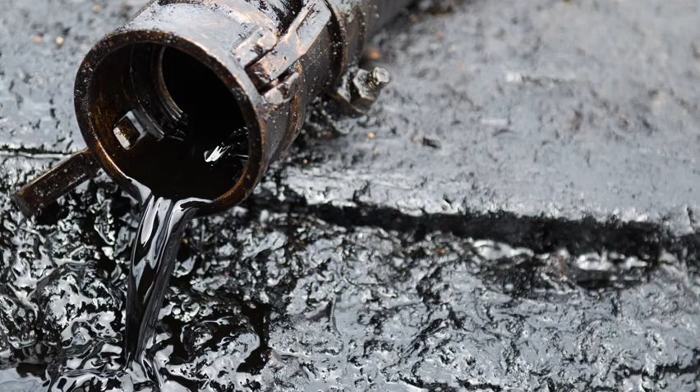This presentation is a training aid for the Spill Prevention Control and Countermeasures Plan, also known as the SPCC Plan. It was developed for Joint Base Charleston Air by the 628th Civil Engineering Squadron Environmental Element. A hard copy of the SPCC Plan can be obtained at the Civil Engineering Squadron Environmental Element in Building 721 at Joint Base Charleston Air.

Instructions to obtain an electronic copy will be provided later in this presentation.

Your point of contact for this training, as well as any questions concerning the SPCC plan or requirements, is the Storage Tank Program Manager at the Environmental Flight, Ms. Mattia Wright. Her phone number is 843-963-4518, or you can email her at mattia.wright@us.af.mil.

Topics to be discussed during this presentation include what is in the SPCC plan. Also discussed will be periodic inspections of oil storage tanks, as well as responding to spills.

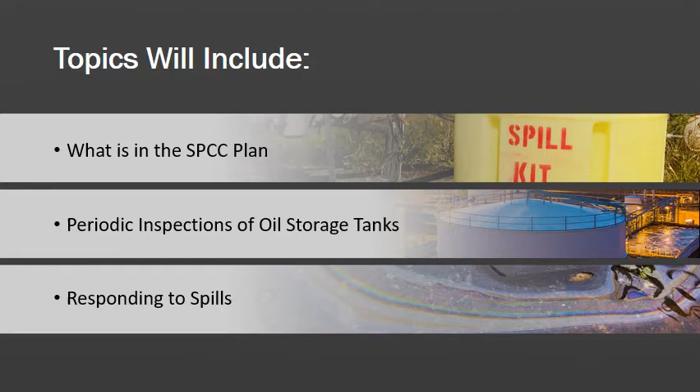So why worry about oil spills? Well, clearly in the past, we are familiar with the Exxon Valdez oil spill or the BP oil spill in the Gulf of Mexico. And obviously, these events had huge detrimental effects on the environment.

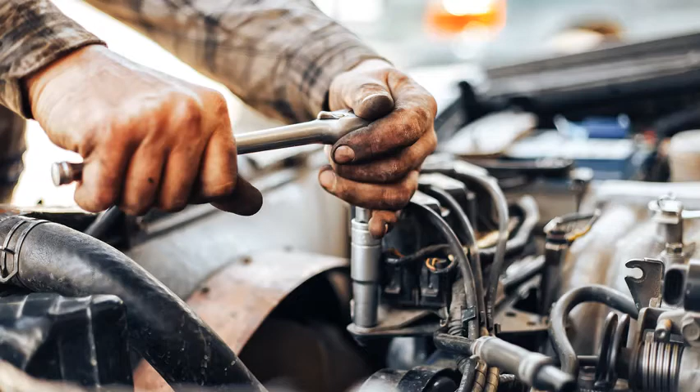But these products are used every day in our everyday life by everybody. It is the environmental engineer's job to find the controls and mechanisms to prevent the release of these chemicals while not interfering with their availability for everyday use, including the production of food and their uses in the actual food we eat.

It is inherently obvious that we want to keep chemical hazards along with their wastes separated from the areas where we live. Even the chemicals used to produce the food that we eat need to be kept separate from the food itself.

When spills of chemicals or oil occur, there is a possibility of people being exposed to these materials by various methods. If any of these chemicals evaporate, for instance, they could become part of the air or smog and be inhaled. It is also possible that the contaminants can work their way into drinking water sources, and people can be exposed by drinking polluted water.

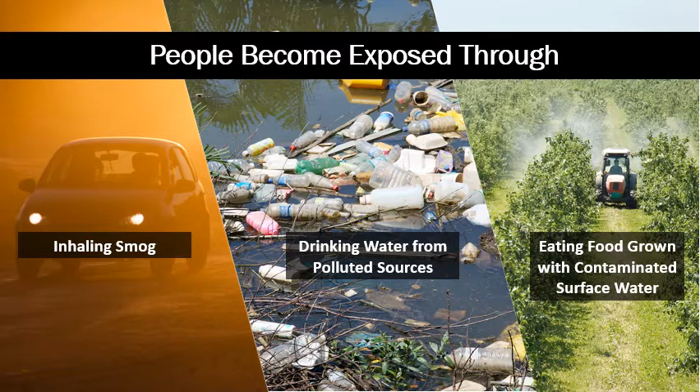Also, if some surface waters are contaminated and that water is used for irrigation, there could be direct contact and exposure to food, and eventually exposure to people through eating that contaminated food. This is what we are trying to prevent: the exposure of people to chemicals that may be detrimental to their health.

Let's discuss from where the authority of the SPCC plan was originally derived. In 1972, Congress passed the Clean Water Act. Once passed, the Environmental Protection Agency, the EPA, was required to develop regulations to assist industries with complying with the new act. Some of the regulations developed required industries and certain facilities to develop plans to prevent the occurrence of spills and other hazards, namely SPCC plans.

The Air Force, in turn, has developed instructions requiring installations to have individual SPCC plans that are at least consistent from installation to installation.

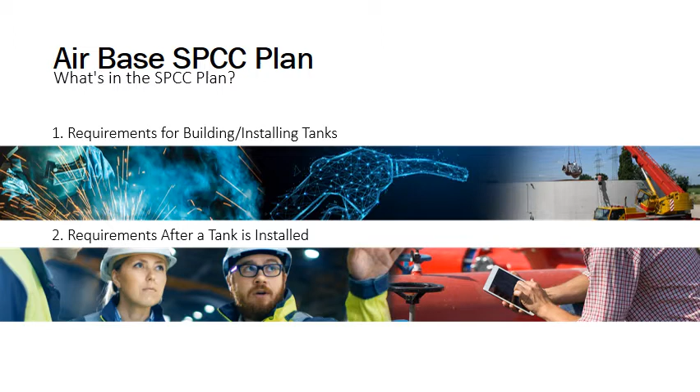Let's look at some of the requirements after a tank is installed. First, there are training requirements. There is both initial and refresher training required by all personnel involved with oil transfers or handling. This is what you are participating in right now.

There are also requirements for inspections to ensure that tanks are not leaking, as well as requirements for when a spill occurs and proper notification procedures. For now, we will discuss general aspects of tanks and berms, as well as some procedures and periodic inspections, and deal with spills and notification procedures later in this presentation.

This is a partial map of the airbase. As you can see in the legend on the right, it takes actually 3 different maps to cover the entire base. It is a map showing the locations of the POL storage facilities at the base. POLs, of course, are petroleum, oils, and lubricants. There are over 400 of these facilities at Joint Base, so we are just using this one map as an example.

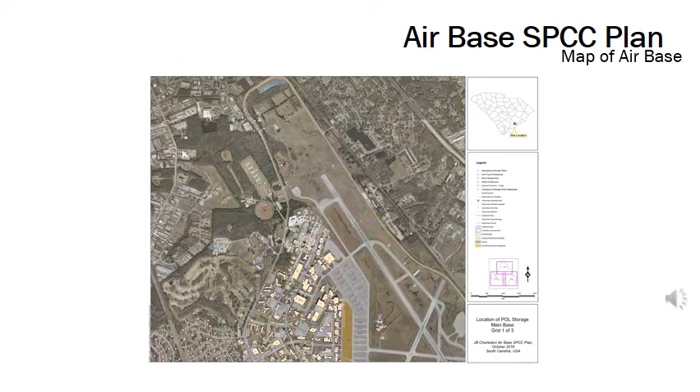These maps provide information of what types of POL storage facilities there are. For instance, A's represent above-ground storage tanks. Anything with a B is where mobile oil bowsers might be located. F's represent fuel truck parking areas. D's represent drum storage areas. And E's represent electrical transformers that have 55 gallons or more of oil contained in them.

Also on these maps are the blue lines with arrows, which show you the direction of stormwater flow, and even more importantly, there are the orange dotted lines, which show you the open stormwater ditches and the actual direction of runoff in the immediate vicinity of a facility. It is vital that all are aware of where the material is going to go if a spill should occur.

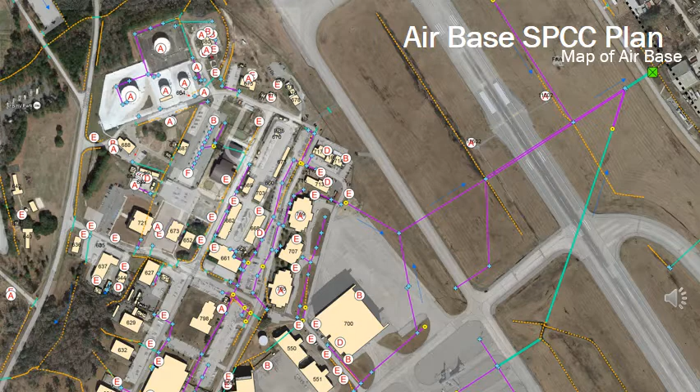Make sure a tank is not leaking when you fill it up. Someone has a painful grasp of the obvious. But this is why SPCC plans are written and standard operating procedures are developed.

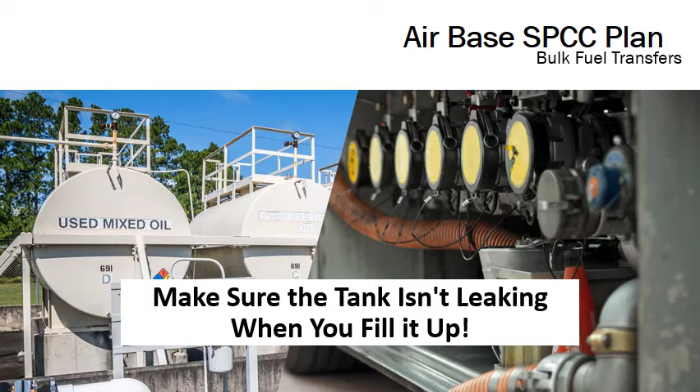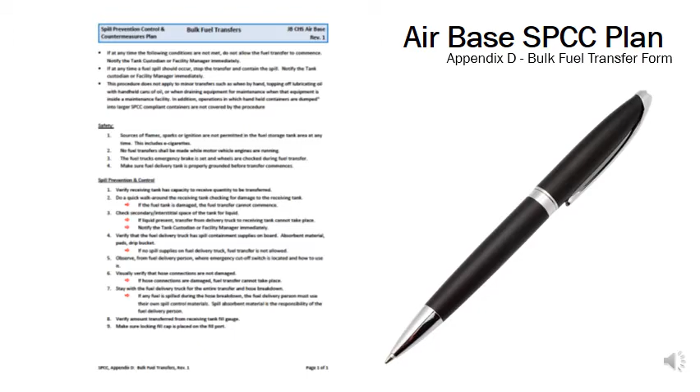In Appendix D of the SPCC plan, there is a checklist to be used when refueling tanks. At the top of the form, there are some conditions and safety items you should observe when refueling a tank. In the middle of the form, several steps are provided to prevent spillage while refueling a tank.

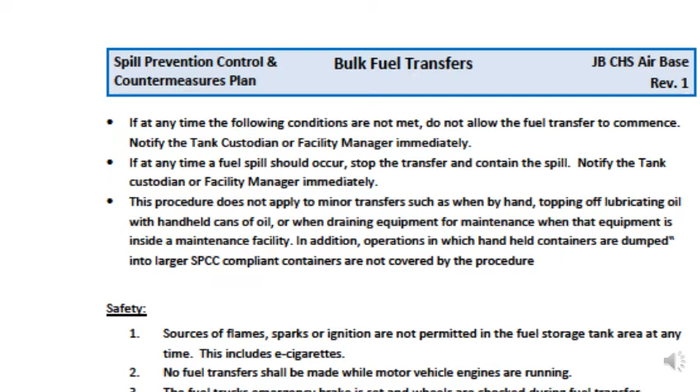For example, verify that the receiving tank has the capacity to receive the quantity you're trying to transfer. By checking gauges before transfer and during the transfer, you can ensure that spillage will not occur. As you approach the maximum quantity of the transfer, you should back off on pumping speeds to ensure no spillage occurs. You should do a quick walk around the tank and check for damage of any kind.

You should check the berm or any other interstitial space for fuel. If there is already fuel in either of these areas, there is obviously an issue with the tank and the refueling should not occur.

Be sure that the truck has containment supplies on board, like absorbent materials, a drip bucket, etc., or that they are available at the facility itself. Be sure everyone involved in the transfer knows where the emergency cutoff switch is located. You should visually verify that all hose connections are not damaged and that the hoses are in good shape.

You should remain with the fuel delivery truck for the entire transfer and hose breakdown. During the time of the hose breakdown, it is most often that spills may occur. Verify the amount transferred from the receiving tank and make sure to lock all fill caps in place on both ends of the transfer.

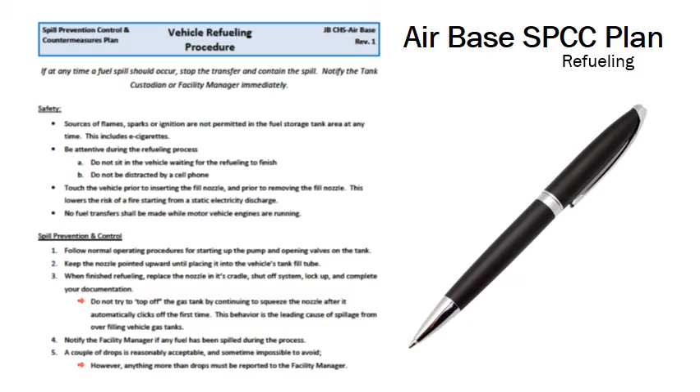The vehicle refueling procedure seen here can be found in the SPCC plan. Some safety measures include: all sources of flame, sparks, or ignition are not permitted in the fuel storage tank area at any time. This includes e-cigarettes.

You should be attentive during the refueling process. Do not sit in the vehicle waiting for the refueling to finish, and don't be distracted by a cell phone. You should touch the vehicle prior to inserting the fill nozzle and prior to removing the fill nozzle. This lowers the risk of a fire starting from a static electricity discharge. And no fuel transfers should be made while motor vehicle engines are running.

A few simple things that could prevent spills would be: keep the nozzle pointed upward until placing it into the vehicle's tank fill tube. When you're finished refueling, replace the nozzle in its cradle. Do not try to top off the gas tank by continuing to squeeze the nozzle after it automatically clicks off for the first time.

And you should notify the Facility Manager of any fuel that is spilled in excess of a couple of drops, which is reasonably acceptable.

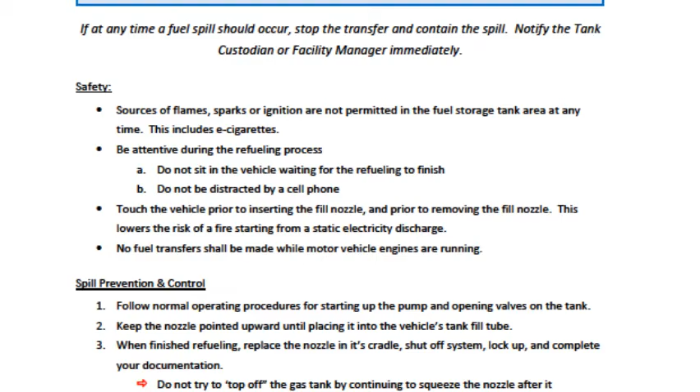The same scenario can also occur when you are pumping gas, whereby the spark could ignite gasoline vapors and may cause a fire or an explosion at the pump. Due to the importance when you are refueling vehicles at Joint Base Charleston Air or your own personal vehicles, we want to reinforce these important safety tips outlined below.

Always turn your vehicle engine off when refueling. Do not re-enter the vehicle while refueling because this can recharge your body with static electricity. If you must re-enter the vehicle, discharge the static electricity buildup by touching the outside metal portion of the vehicle away from the fuel tank.

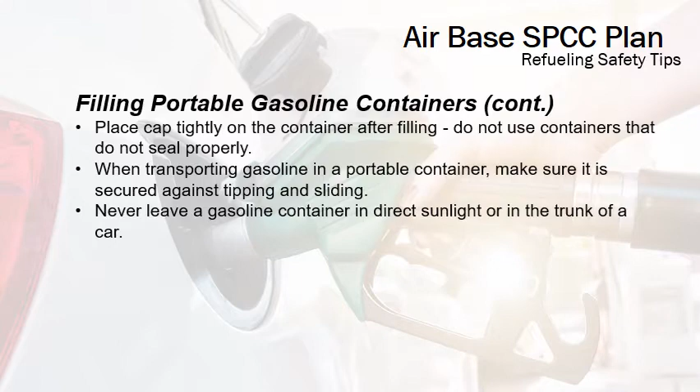Should a fire occur during refueling, you should leave the nozzle in the vehicle and back away from the vehicle. Use the emergency shutoff button to shut off the pump and notify the station attendant.

Now let's discuss monthly tank inspections. The AFI requires monthly tank inspections. Primarily, these inspections are performed by the owner or operator of the tank. That means if you have a tank at your facility, you are responsible for its monthly inspection. Tanks attached to generators are primarily inspected by PowerPro. There are also annual tank inspection requirements, but those more in-depth inspections are performed by the CE environmental element.

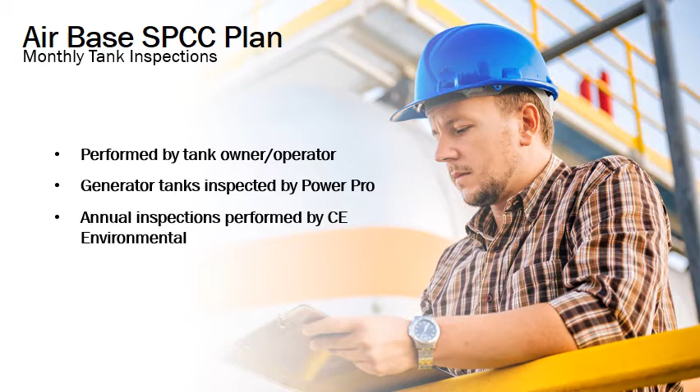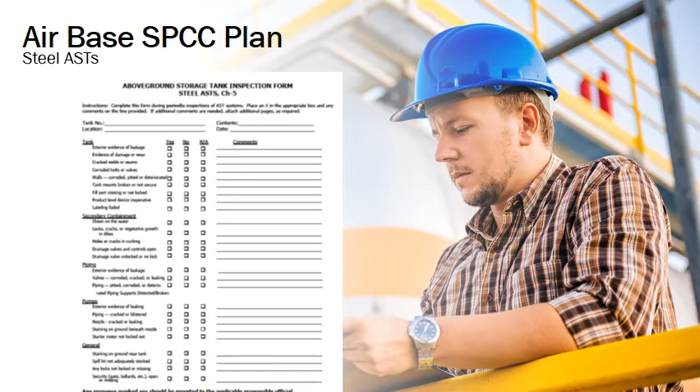It should also be noted that an equivalent form can be used rather than the specific forms found in Appendix D. An equivalent form in this case means any inspection form that meets the intent of the regulation 40 CFR 112. You should contact the environmental office if you want to know if the form you are using is acceptable.

Note the information required at the top of the form: tank number and location, as well as the contents of the tank and the date of the inspection. Also at the bottom, the inspector must print his or her name and sign the form. The form is broken up into several sections, and depending on the tank, not all of the questions may be appropriate for the tank you are inspecting. Hence, there is a not applicable column.

The first section on the inspection form is tank. There are various kinds of tanks at Joint Base Charleston Air, which we will discuss later. For instance, single-walled tanks versus double-walled tanks. For this discussion of inspections, we are talking about what you would naturally perceive as the tank, which would be both tanks of a double-walled tank, or obviously a single-walled tank. Carefully inspect the tank and make the necessary notations on the inspection form.

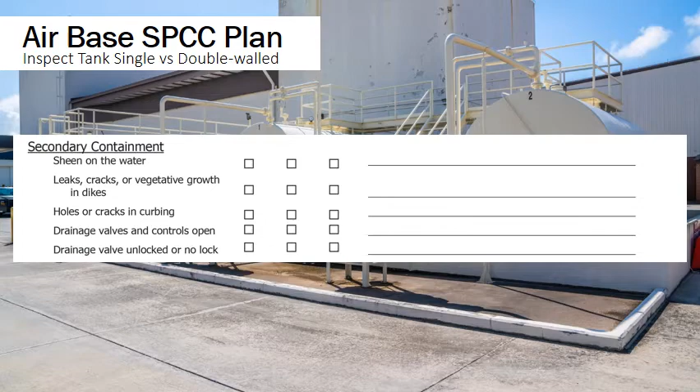Berms are a common secondary containment option. The interstitial space of a double-walled tank is also considered secondary containment. There are varying types of interstitial spaces and types of tanks, which we will discuss now.

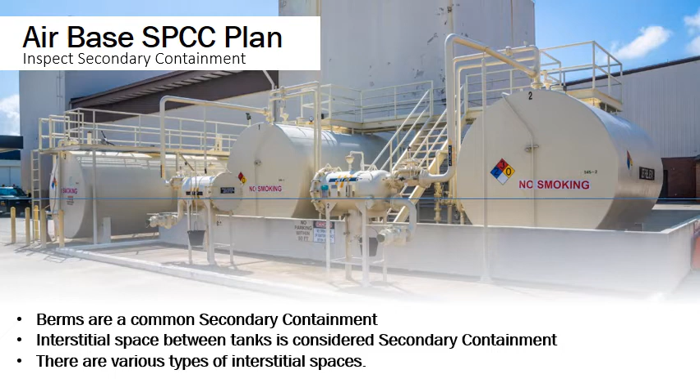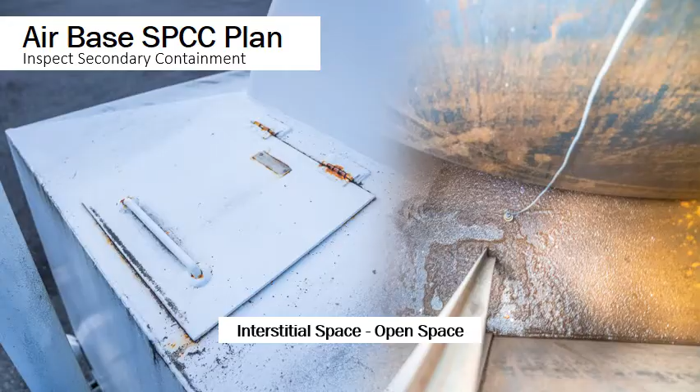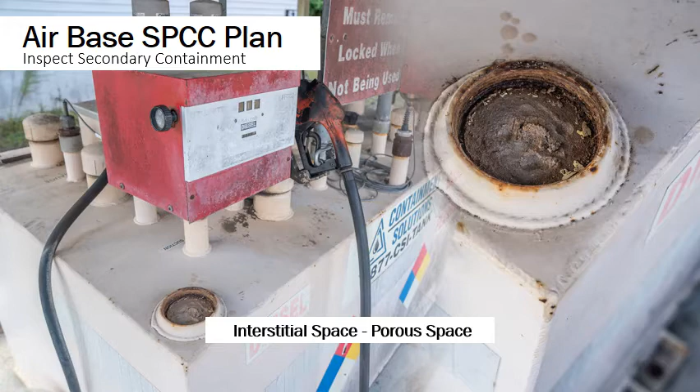This is an example of a porous space interstitial space. This interstitial space is filled with a sand-like material or grit. The only way to check for evidence of a fuel leak of the interior tank on an interstitial space of this type is to check the sensor readings. The sensors will be at the bottom of the interstitial space.

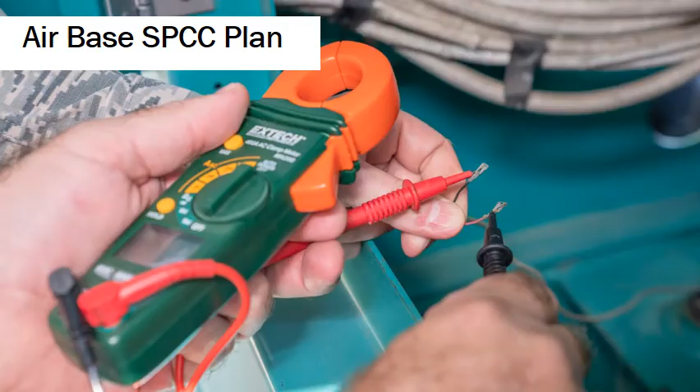Since some interstitial spaces are sealed, as are many double-walled tanks, and use sensors to detect any leaks, as is also the case for porous space interstitial spaces mentioned earlier, it is important to note that the sensors used need to be routinely checked to ensure that they are in proper operating condition.

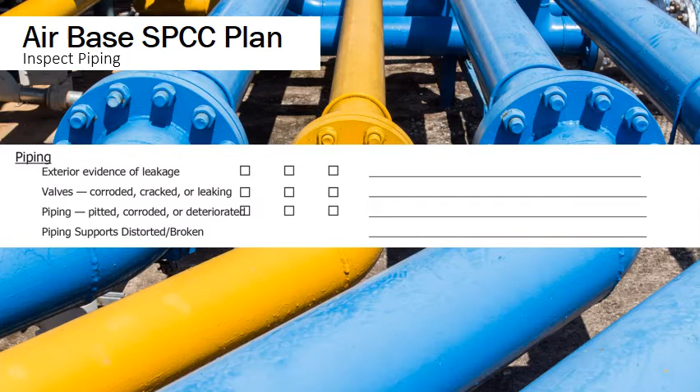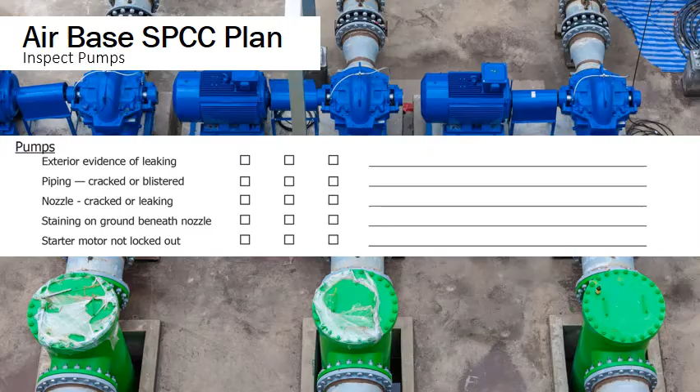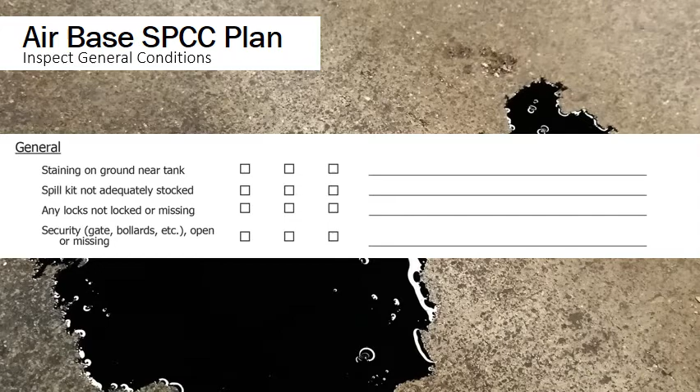There is also an electronic version of this checklist available online through the internet. If you are interested in using it, please contact the tank program manager at the environmental element, Mr. Earl Folger. He will need to grant you access and provide the necessary training for you to properly input information into the database.

The Storage Tank Accounting and Reporting, or STAR module of the APIMS database, is required by Air Force Instruction 32-7044 for all storage tanks. Access to this database requires a CAC-enabled computer and proper permissions granted to each individual user.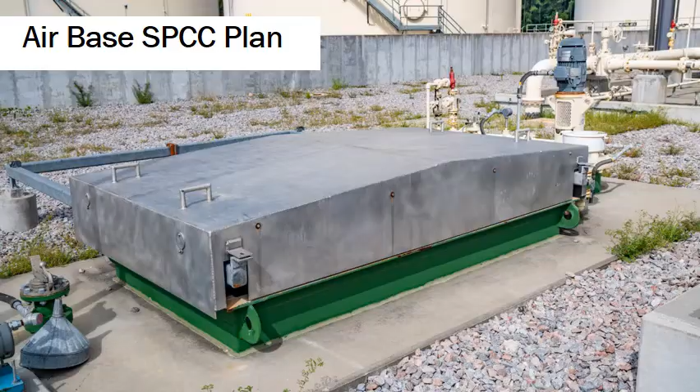The following slides will be a discussion about various types of tanks and berms, providing different examples at the Joint Base Charleston Air Site. The first of which is a vault tank, which is seen here in the closed position.

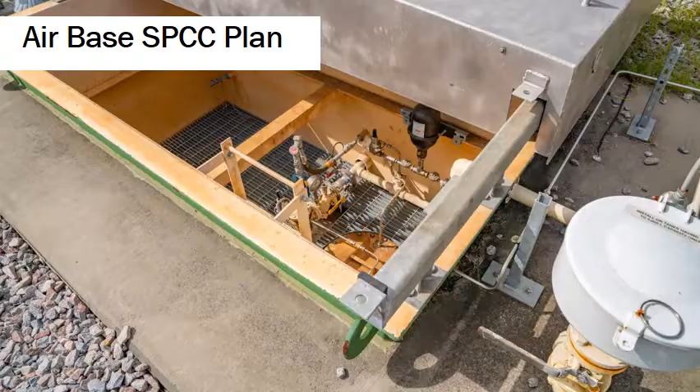In many cases, piping for fuel transfers is actually left fully charged or full of fuel when not in use. So when the time comes for maintenance on the line, the fuel is often pumped or drained to this vault tank so it can be recovered.

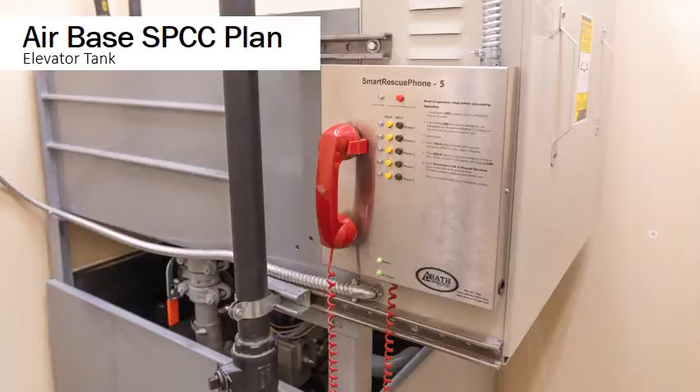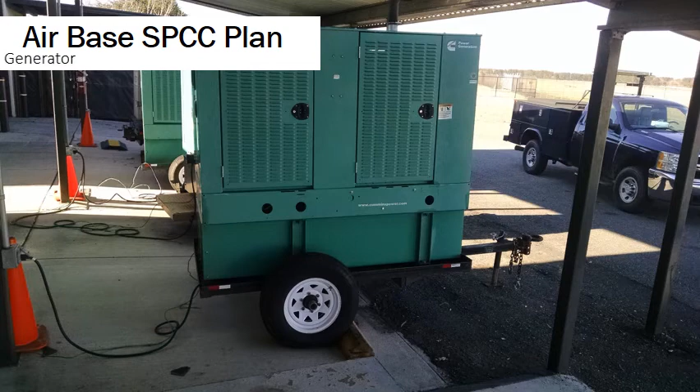This is an example of a portable generator with a belly tank. Whenever this equipment is not in use, it should be stored in an area that provides secondary containment.

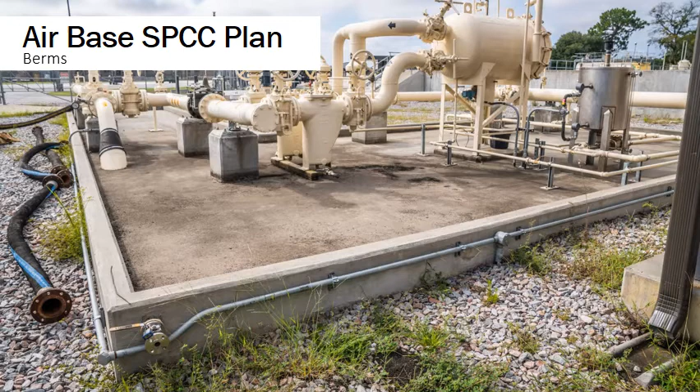Berms come in various shapes and sizes. They are designed to hold a certain portion of the fuel in the tanks or piping that they contain. Note the valve in the lower left corner, which is currently locked. This is the valve used to drain the berm of rainwater using very particular procedures, which will be discussed later.

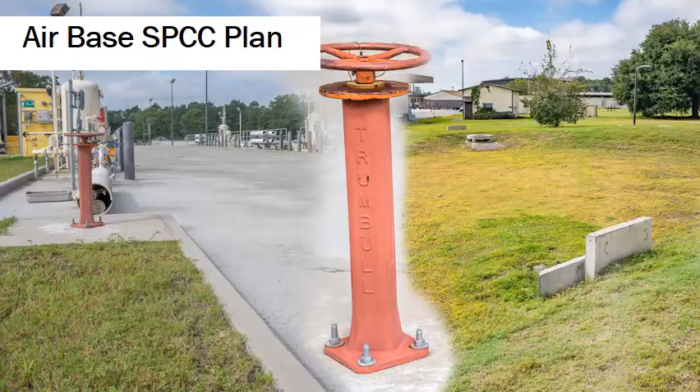We use the berm in this slide as an example of how a large area can be supported by a particular berm. The whole area on the left is the berm itself. There is what you would think was a storm drain in the middle. The valve highlighted in the middle of this slide, which can originally be seen towards the left, operates the valve that would release the rainwater from the berm after it fills up. On the right, you see the area where that storm water would drain to. Of course, this happens only if there is no fuel present, following particular procedures which will be discussed later.

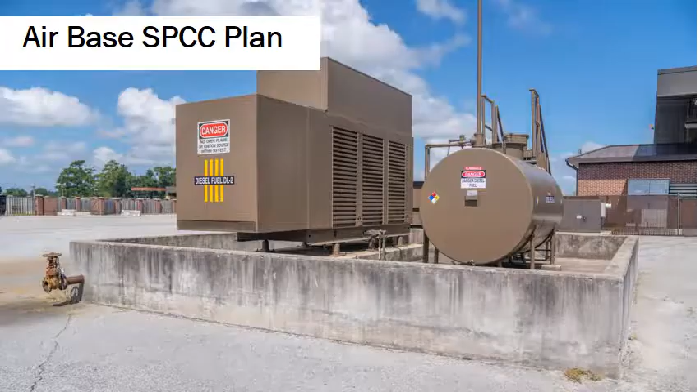As mentioned earlier, berms are to be maintained by the owner and operator of the facility they support. Maintenance of the berm can include removing any wind-blown debris, leaves, or trash. All berms should have non-automatic open and close valves. These valves are to remain closed and locked until rainwater needs to be drained.

A trained person knowledgeable in detecting sheens has to visually inspect and determine if a berm can be drained to the ground.

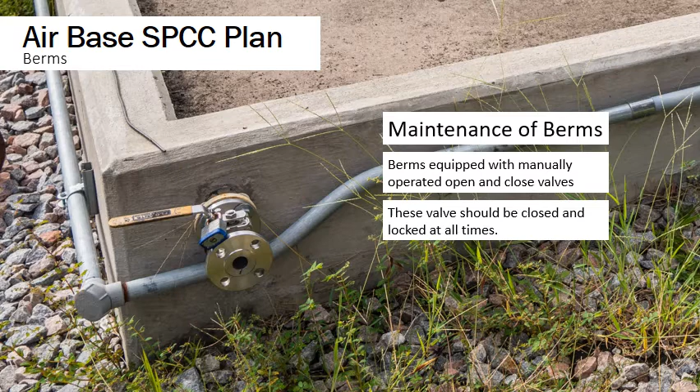The following procedures should be used in the process of draining a berm. First, inspect the rainwater for a visible sheen. For a minimal sheen, you can use absorbent pads to remove any product. When no sheen is present, unlock and open the valve to drain the berm. After the berm is empty, close the valve and lock it. Lastly, be sure to complete the secondary containment drainage log. It should be noted that if the sheen is excessive, or there is actually a layer of product in the berm, you should contact the environmental element for assistance in investigating the possible source.

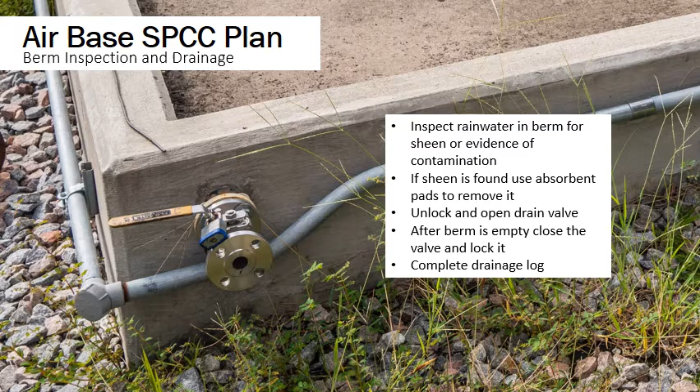A secondary containment drainage log must be kept for all berms. This draining log form can be found in Appendix D of the SPCC plan.

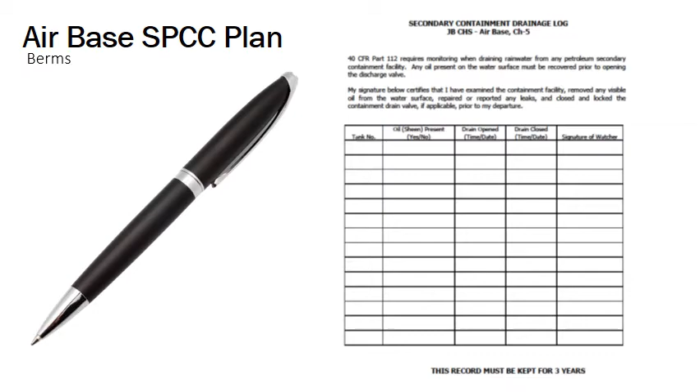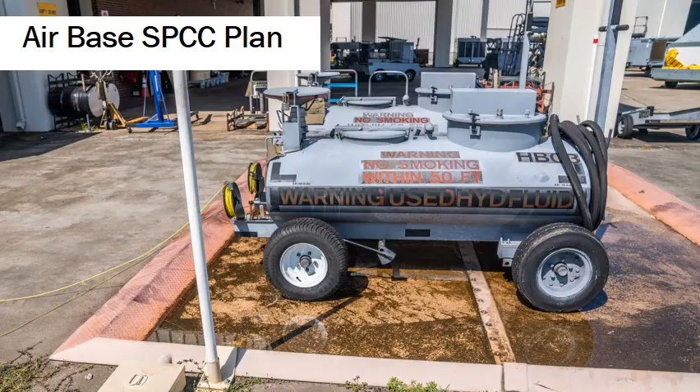Bowsers, when not in use, are stored in areas with secondary containment. It should be noted that empty bowsers, however, do not have to be stored in a containment area. Even though these bowsers are parked in what may be considered a temporary secondary containment, or berm, it still should be inspected, maintained, and drained according to the same SOP as a concrete berm.

All bowsers should be operated in accordance with their individual technical manual. Specific SOPs should be followed for the filling and transfer of fuel to and from the bowsers.

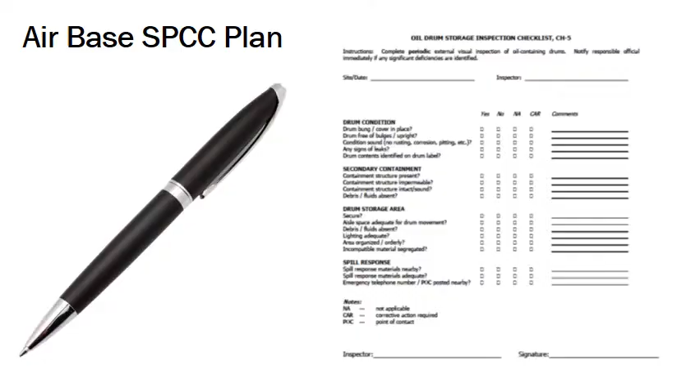Here is an oil drum storage area checklist from Appendix D of the SPCC plan. This should be used to inspect the drums on a regular basis, usually at least weekly. Any other form that may be used as a checklist must be approved by the environmental element before use.

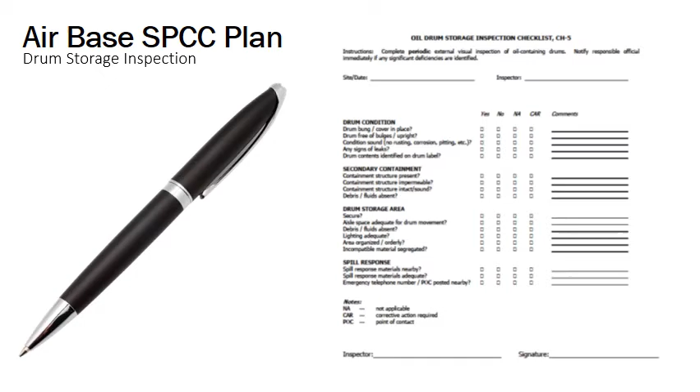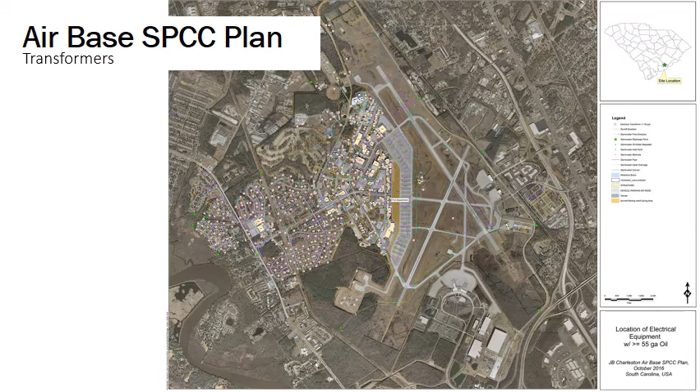A map is provided in the SPCC plan showing where all the electrical transformers containing in excess of 55 gallons are located. There are hundreds throughout every area of the airbase. Airbase electrical shop personnel are charged with doing the periodic inspections on all transformers. The checklist shown here is found in Appendix D of the SPCC plan and should be used for that inspection unless another form is approved by the environmental element.

Please note that although there is a section on the inspection form for secondary containment, there are no electrical transformers at Joint Base Charleston Air that have secondary containment. Each item in this section will be marked as not applicable. Anyone on base, however, who observes that there is an issue, perhaps a leak or a spill from a transformer, should report it immediately to the environmental element personnel and the electrical shop.

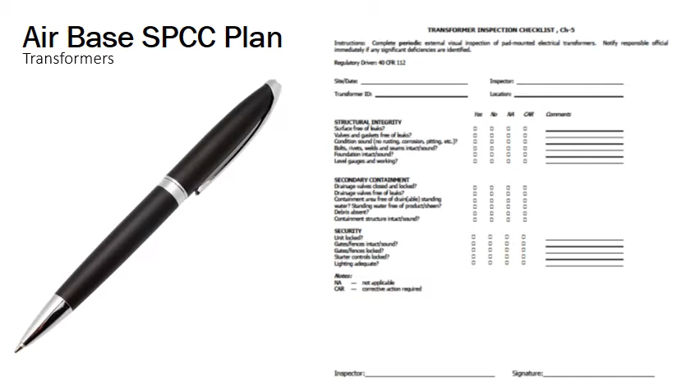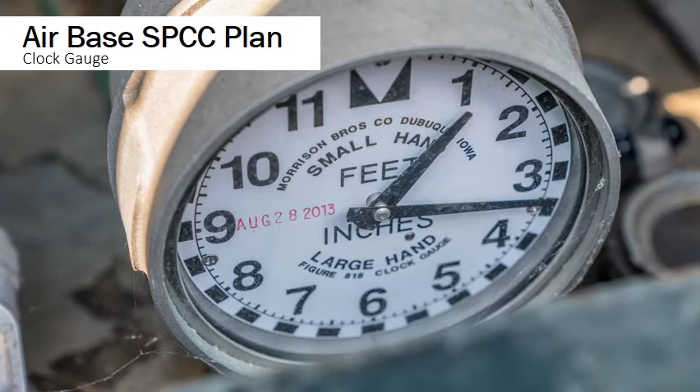One word of caution: sometimes gauges of this type become inoperable due to corrosion or buildup of materials around the disc inside the gauge. The only way to check this is to unscrew the gauge, which you should be able to do by hand, and make sure the disc is free to move and not corroded. There have been instances where the gauge indicated no material in the interstitial space, but because of corrosion, the disc did not rise up as expected and the leak went undetected.

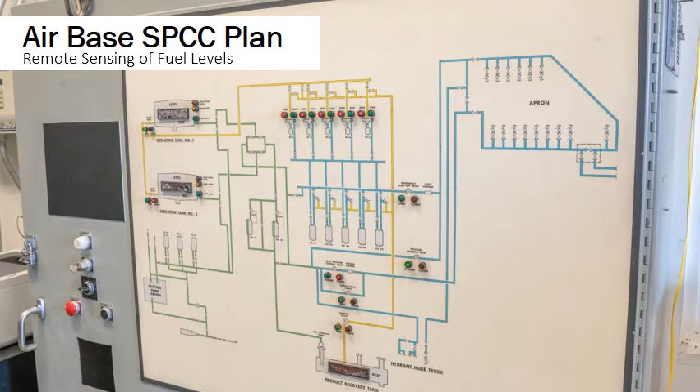Often in areas containing large fuel tanks, there is remote sensing of fuel levels. For instance, at the POL yard, their tanks are continuously monitored from within the control room. Also, the pumping of fuel and filling of tanks can be monitored and controlled from remote spaces, as is the case at the POL yard. All local SOPs need to be followed to ensure that transfers are continuously monitored to prevent any overfilling.

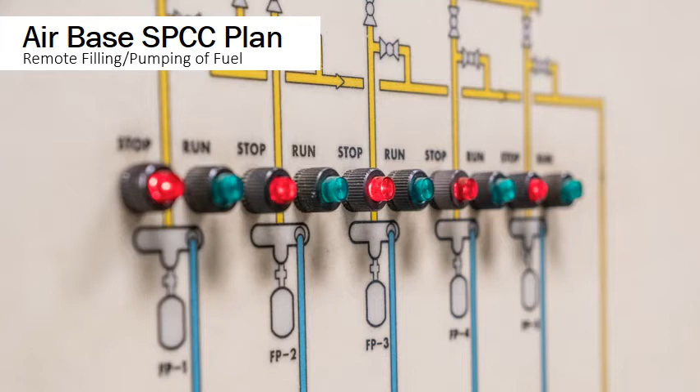It is vital that you are familiar with your surroundings and observant to what is going on. You should resist the urge to be complacent during routine operations just because you've done them 100 times. Always be vigilant and follow required SOPs. They were developed for a reason.

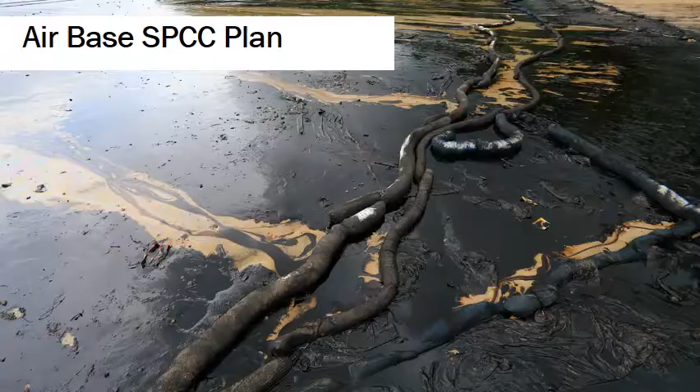Now let's discuss the last topic of the presentation: responding to spills and notifying proper personnel.

In accordance with the SPCC plan, the following steps are to occur concurrently in the event that a spill occurs. First, immediately notify the Joint Base Charleston Air Fire Department. If it is safe to do so, provide emergency assistance to any injured persons. Also, if it's safe to do so, stop the source of the spill or leak if possible. Further, you should restrict all ignition sources if flammable vapors are present. And if you are properly trained and authorized, you should initiate available on-site measures to minimize the spread of contamination.

Otherwise, stand by until emergency response personnel arrive on scene. Provide them with all the known details of the spill when assistance does arrive.

The key here is to recognize that anyone could perform steps 1 and 6: notifying the proper personnel and providing information to responders when they arrive at the scene. If it is safe and you are properly trained to do so, you can perform steps 2, 3, 4, and 5. But it is important not to assume that someone else is going to take care of the problem after you discover it.

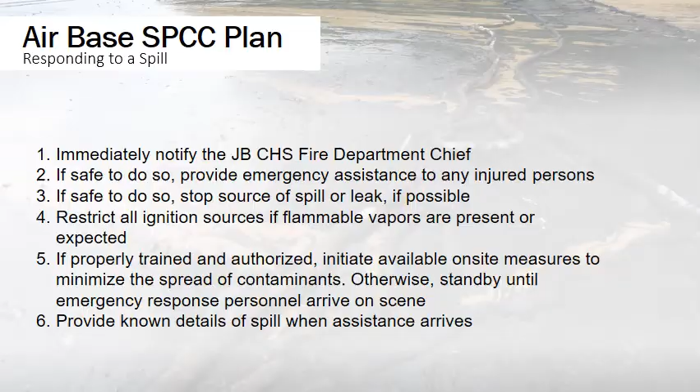As you are cleaning up the spill, remember that all materials used will need to be containerized in a drum or other proper container and prepared for proper disposal. This material may include the absorbent material spread to soak up the liquid, for instance the kitty litter or clay material, any absorbent pads or socks that were used, and any personal protective equipment worn during the cleanup.

One should keep in mind that very often this waste is disposed of at a cost per pound. You certainly should use enough material to get the job done, but keep in mind any excessive contaminated material will increase the cost of disposal. However, it is more important to get the job done.

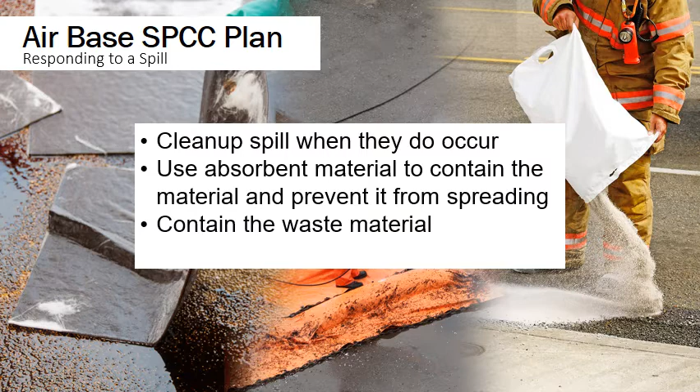Arrangements will need to be made to have any contaminated materials properly disposed of. Depending on what was spilled and the methods and quantities of materials used during the cleanup, disposal methods can vary.

Now let's discuss how to dispose of materials properly. There are varying methods of disposal depending on the type of materials themselves.

Recovered product: if the spill that occurred was large enough and you were actually able to recover product and it was still clean and usable, then no disposal is necessary. You should try and reuse it if possible.

If the spill occurs over dirt, then we have generated contaminated soil, and all contaminated soil must be dug up and containerized. Depending on the amount of soil, this may be done in drums, or oftentimes a dumpster is brought in for large quantities. This disposal should be coordinated through the environmental element and properly credentialed disposal contractors.

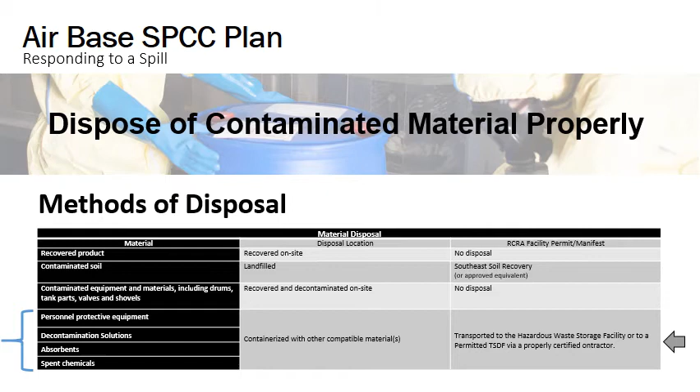Taking another look at our spill response procedures. Anyone can and should notify the fire department when discovering a spill by calling 911. It should be noted, however, if you are using a cell phone to call 911, you will have to tell the operator that you are on Joint Base Charleston Air. The reason for this is if a cell phone is used, the cellular system may route your number to a county dispatcher in Berkeley, Charleston, or Dorchester counties.

But what if there's an injury at the scene? What if you can't stop the leak or restrict any ignition sources? Or you are not trained to initiate cleanup? Then it is your job to ask for and get help. And when help arrives, provide them with as many details and as much information as you can.

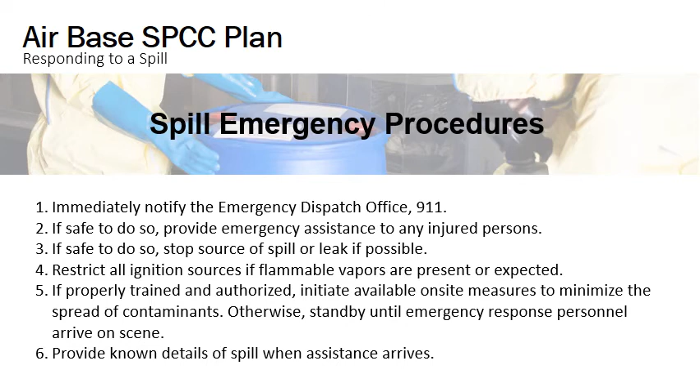Do not be afraid to ask for help, even if you may have mistakenly caused a spill. People do not get in trouble for asking for help. They get in trouble trying to cover things up when they should have asked for help. Remember, always ask for help.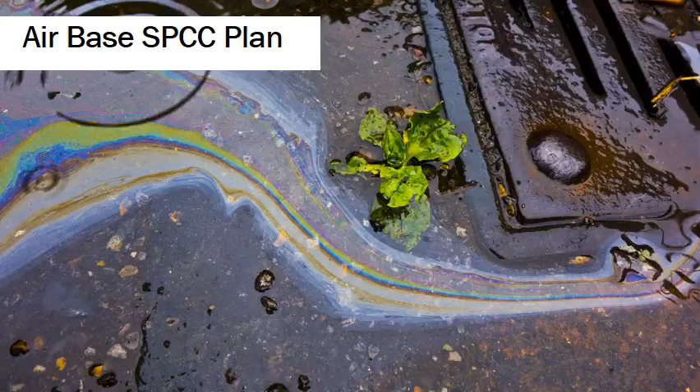Now let's look at a few examples and see if we can determine if a spill response is necessary. Here is an example where you can see a sheen flowing directly into some sort of storm drain. Obviously, this will require a spill response. If it is safe to do so, the spill can be stopped or diverted by placing absorbent pads over the drain, or by using a granular material to dam the flow of the contaminated water.

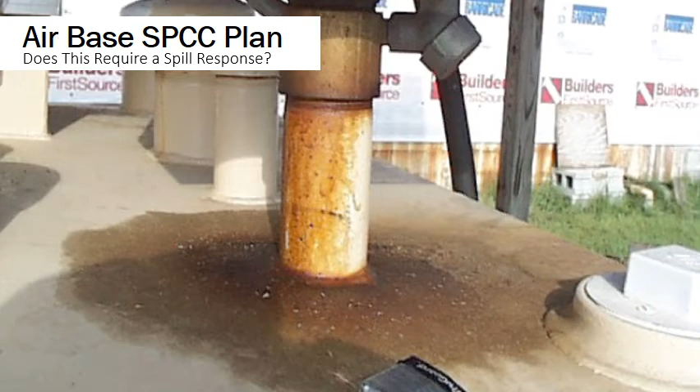Does this require a spill response? You can see some staining on the side of the tank where apparently a leak or spill has taken place. Taking a closer look at the top of the tank, it does not appear there is an active leak. The stain is not getting bigger. Should this be cleaned up? Yes. Should someone be notified? Yes. Does this require a spill response? No, the stain is not getting any bigger, and there's not an active leak.

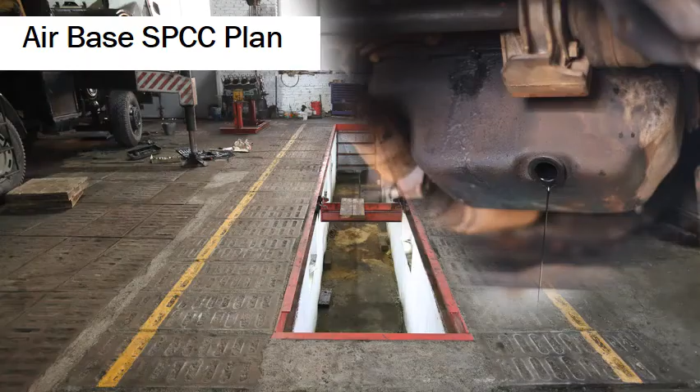Let's take a look at this situation. A spill has occurred, but it is contained completely within a building. There is no release to the environment. It would be an obvious concern to the shop personnel and especially the shop foreman, but environmentally speaking, it has not reached the outside environment and therefore does not require a formal spill response from an outside entity.

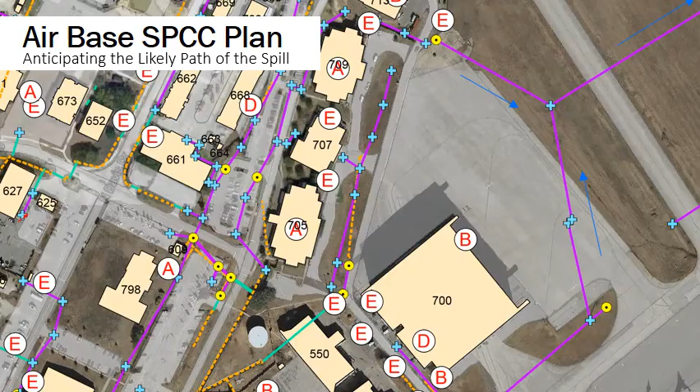Now that we have discussed what may or may not require a spill response, let's take the next step and discuss what needs to be done after the cleanup is complete and you need to report and document the spill.

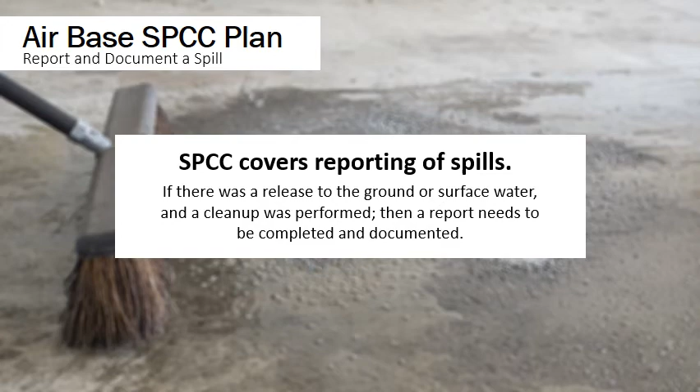The SPCC plan covers the reporting of spills. Per the SPCC plan requirements, if there was a release to the ground or surface water and a complete cleanup was performed, then a report needs to be completed and documented.

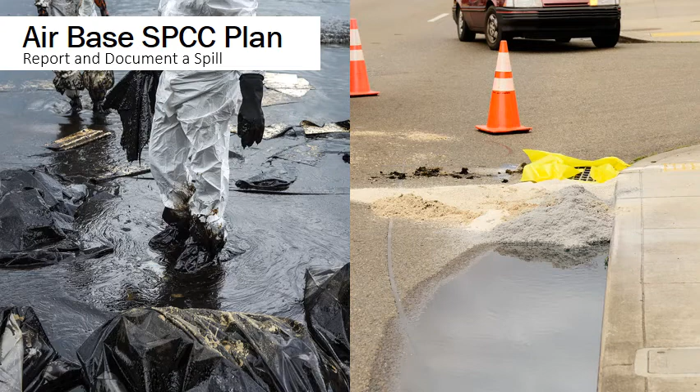Look at these two examples. On the left, you see a large spill with absorbent materials and obviously a large cleanup underway. This is clearly a release to the environment, and a report to either the fire department or the environmental element will be required. On the right, you see a spill that quite possibly may have made it to the storm drain and possibly extended off-site. A report will need to be made to the fire department and the environmental office. They in turn will determine whether or not a report needs to be made to any outside regulatory agency.

Let's refer back to the previous situation where a spill occurred but was completely contained within a building and there was no release to the environment. This is clearly an example of when a spill report is not necessary.

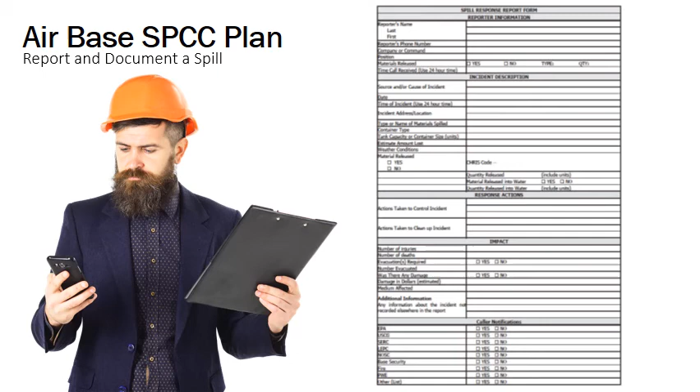First, under the incident description, you must document the type and quantities of material spilled. You must fill in the type and your best estimate of the amount of material spilled. If the spill managed to reach a body of water, such as a creek or a pond, then estimate how much actually made it to the water. Even a small amount that causes a sheen on the water needs to be reported. This information will be important in the determination of whether or not an outside regulatory agency needs to be contacted.

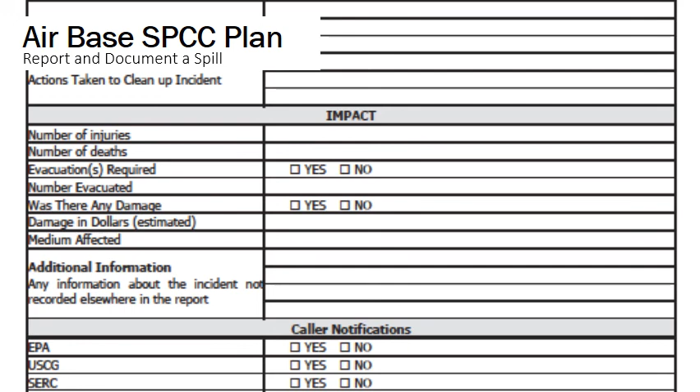You should provide all the information you can on the impact of the spill. At the bottom of the form is a section called caller notifications. Under certain spill conditions, outside organizations may need to be contacted in the event of a spill, but it is the responsibility of the fire chief or the environmental element chief to make that decision.

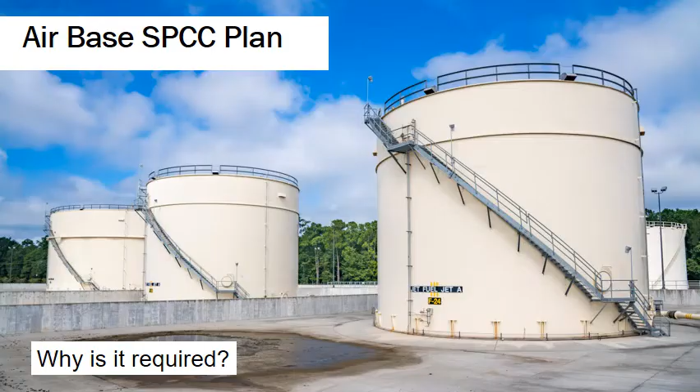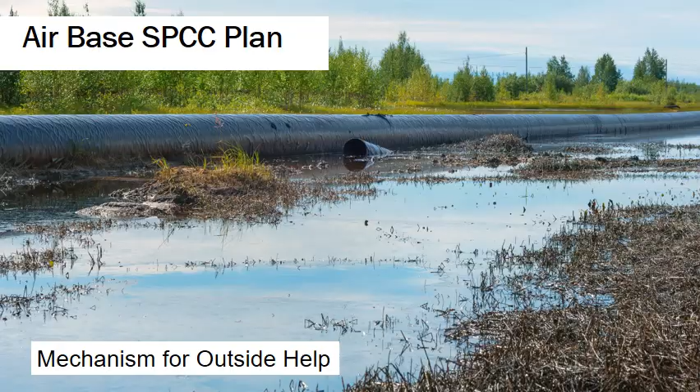The reason that a facility response plan is required at Joint Base Charleston Air is because the base stores over 1 million gallons of fuel or other regulated materials on site. The facility response plan is also a mechanism to provide assistance in obtaining outside help in the event of a spill. It contains outside response organization information, like contact information, along with the contractor's capabilities and their equipment and resources available to the base should they be required in the event of a large spill.

There is an annual training requirement for the facility response plan. This training may or may not include an actual spill exercise. This training will be coordinated and scheduled through the environmental element.

In closing, it is important to realize that it is everyone's responsibility to keep their eyes open for things that look wrong and report them to the proper personnel.